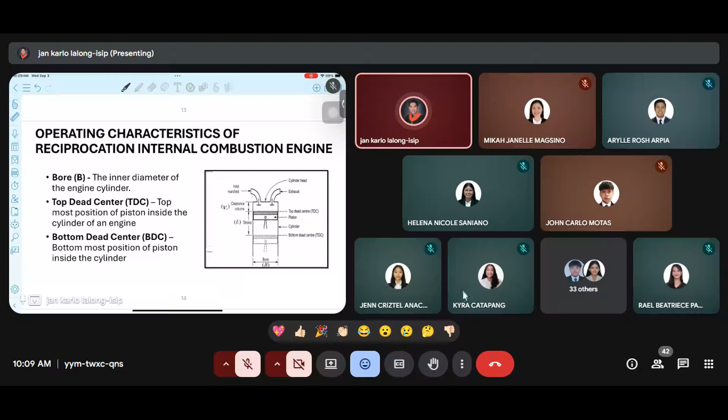First, ano ba yung mga parts or ano bang tawag dun sa mga parts natin ng ating internal combustion engine. Okay, so pakibasa nga. This is our first part.

Sige, have HN. Nandito ba? HN. Yung ano po yung bore po.

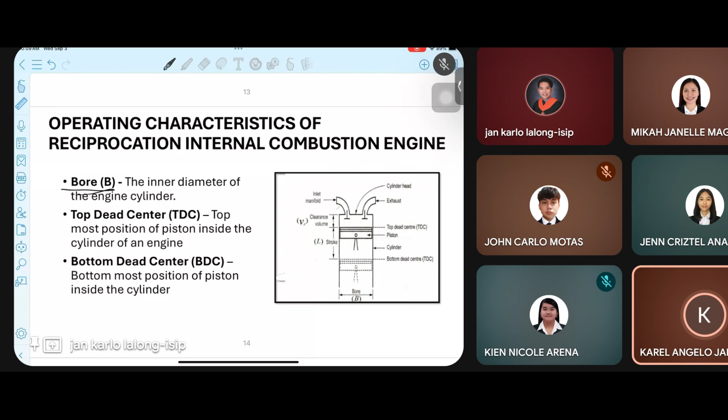Okay, so yung tinatawag nating bore, that is the inner diameter ng ating engine cylinder. So ito yung ating bore, itong part na to. So ito yung diameter ng ating cylinder, kasi our cylinder, syempre, that is in cylinder shape, so that is the diameter. Okay, so are we clear kung ano yung ating bore? Nakita naman.

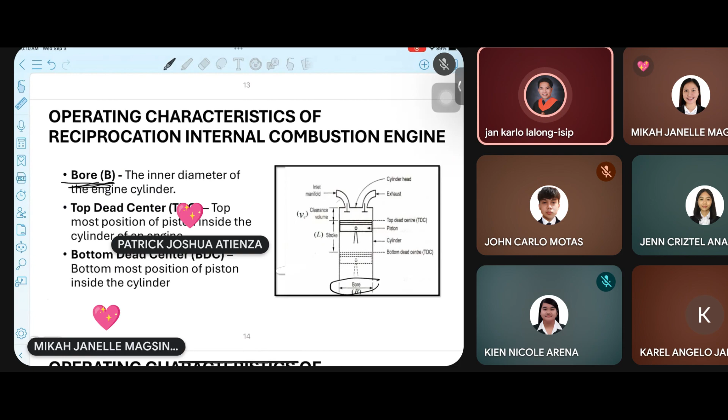Okay, so next natin, we have the top dead center. Ang top dead center natin, that is the topmost position of piston inside the cylinder of the engine. So that is the maximum height ng ating piston. So ito yung ating top dead center, meaning kapag gumalaw yung ating crank, yung piston natin, ito yung pinakamataas na level sa ating cylinder, or the topmost position ng ating piston sa ating cylinder. So ito yung ating top dead center na tinatawag.

The same, we have our bottom dead center. Yung ating bottom dead center, that is the lowest naman, so that is the bottommost position of the piston inside the cylinder. So dito, pagbaba ng ating piston, sa intake natin, so we have the intake and the power stroke. During yung pinaka-lowest point ng ating piston, that is called our bottom dead center.

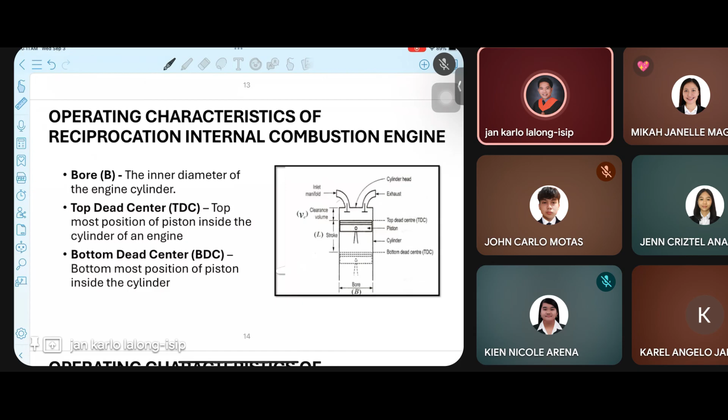So, kindly take note of those parts kasi in the future, use that. Okay, so next part natin, we have our stroke. So, wait lang. Thermo.

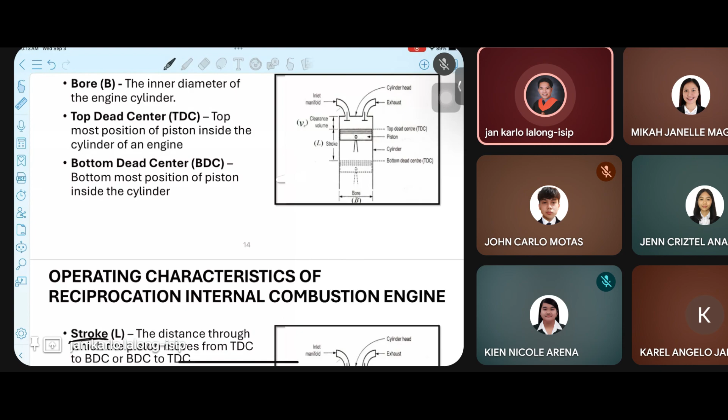Okay, so let's continue. We have yung ating stroke. So, take note na lang din ng ating mga variable na ginagamit. So, for bore, that is B. Top dead center, TDC. And the bottom dead center, that is BDC.

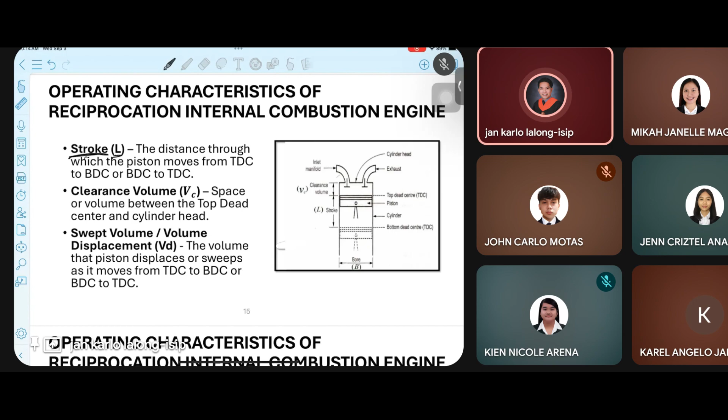Okay, so let's proceed with our stroke. So stroke natin, that is L, yung variable natin na ginagamit. So that is the distance through which the piston moves from the top dead center to bottom dead center. So sa madaling salita, yung ating stroke, ito yung distance from our top dead center up to our bottom dead center.

Okay, next we have our clearance volume. That is the space or the volume between the top dead center and the cylinder head. So pag sinabi natin clearance volume, kapag nasa top dead center na tayo, that is the volume from this top dead center hanggang dun sa ating cylinder head. So ito, itong part na to, yung ating clearance volume.

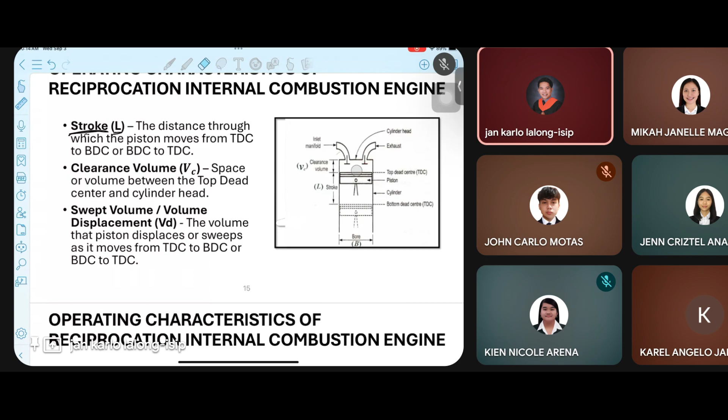We also have our swept volume or the volume displacement. So known siya sa problem as our volume displacement. So the volume displacement, that is the volume that piston displaces or sweeps as it moves from the top dead center to our bottom dead center. So yung ating volume displacement is from our top dead center up to our bottom dead center. So ito naman yung ating volume displacement.

Nandito ba? Arpia? Yes po, sir. So, paano na kaya natin makukuha yung volume ng cylinder given yung ating clearance volume at ang ating volume displacement? So, based on its definition.

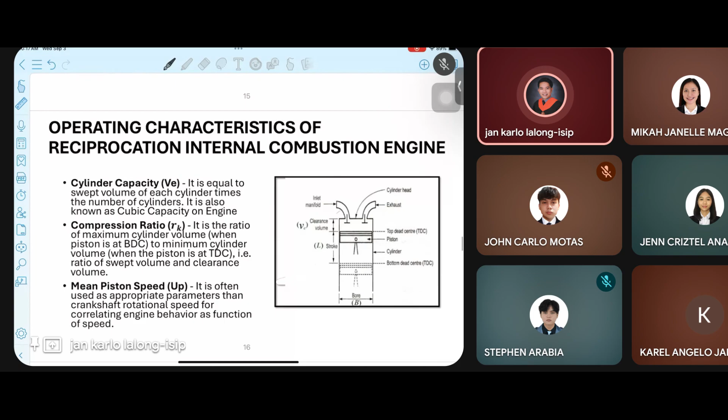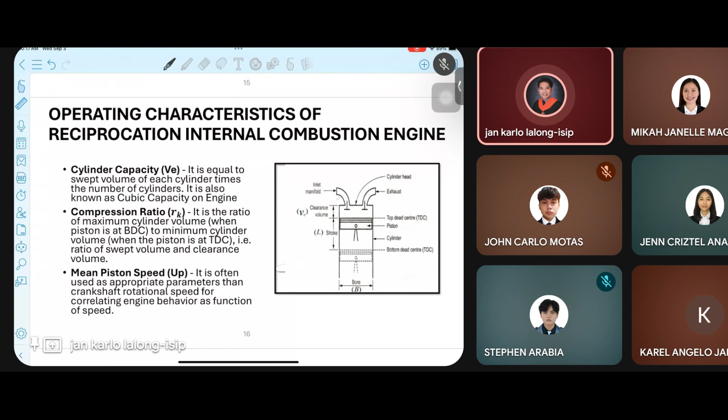Okay, so next we have our cylinder capacity. So yung ating cylinder capacity, it is equal to the swept volume of each cylinder times the number of cylinders. So alam naman natin, internal combustion engine, hindi lang naman iisa yung ating cylinder na ginagamit. So there are multiple cylinders na ginagamit natin depending on the type ng ating engine. So, yung ating cylinder capacity, that is yung swept volume natin or the volume displacement natin of each cylinder times kung ilang cylinder yung makikita natin sa ating engine.

So we have also here our compression ratio, that is RK, the variable we use. Please take note that this is the ratio of the maximum cylinder volume to the minimum cylinder volume. So what is that volume? We have the volume of the cylinder. Wait, that is not C because clearance volume is our VC. So the volume of the cylinder is equal to our volume displacement plus our clearance volume over our minimum cylinder.

So if we are asked to get our compression ratio, usually it's already given. But if it's not given, and what's given is our volume displacement and our clearance volume, then that is the volume displacement plus the clearance volume over our clearance volume. Okay, so did we understand our compression ratio?

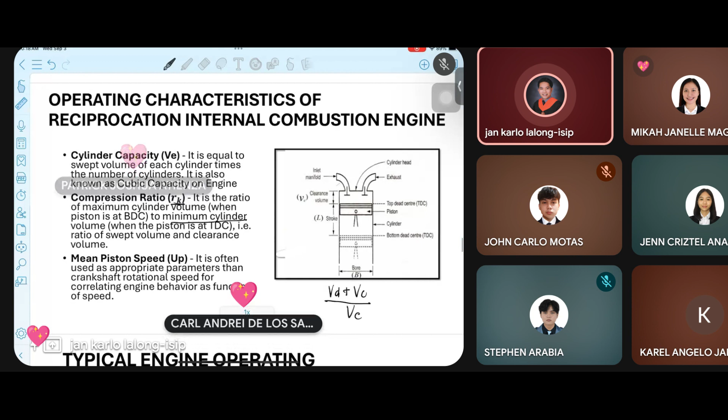So make sure that you absorb these terms. Okay, so our next term is our mean piston speed. Our mean piston speed is U sub P. So if it's just piston speed, that is U sub P. But when we say mean piston speed, that has a bar, so U sub P bar. Okay, are we clear with that?

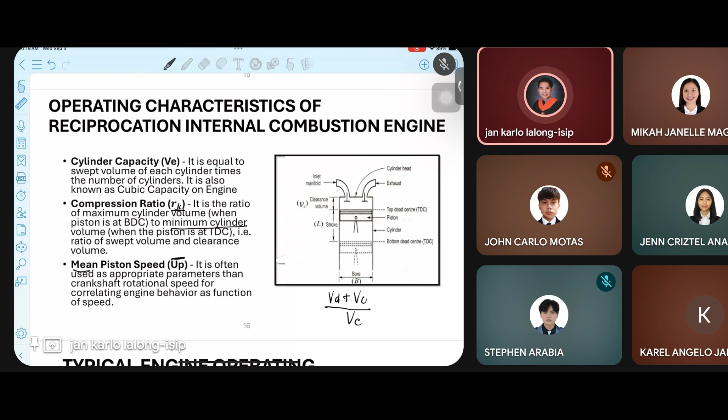Okay, so what is our mean piston speed? That is often used as a more appropriate parameter than crankshaft rotational speed for correlating engine behavior as a function of speed. Later on, I will show you the formula for the mean piston speed. Okay, are we clear with these terms? We are going to use this mostly later in our formulas, so kindly take note of these parameters.

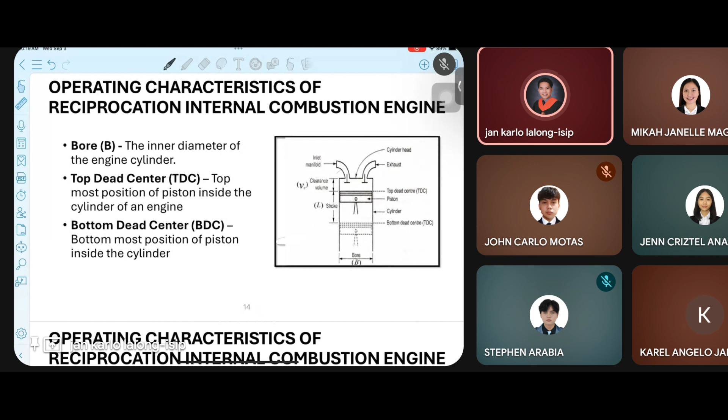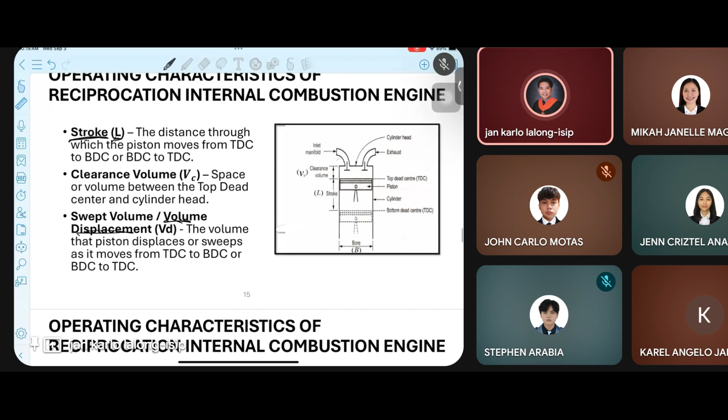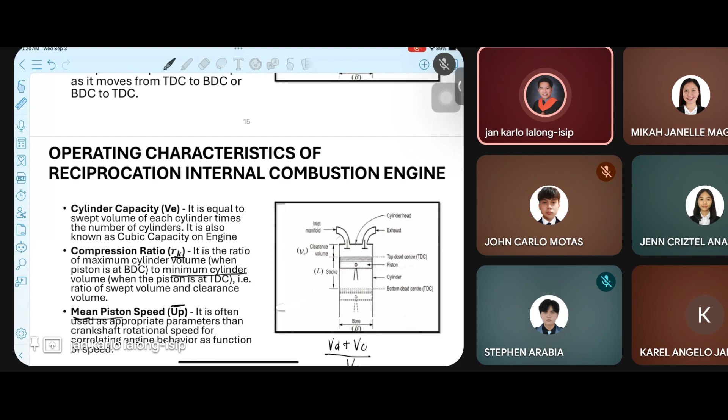So we have the bore, the top dead center, bottom dead center, and our stroke is L. Then our clearance volume is V sub C, our volume displacement is V sub D, and our cylinder capacity is V sub E. Then we have our compression ratio, that is RK, and the mean piston speed, that is our U sub P.

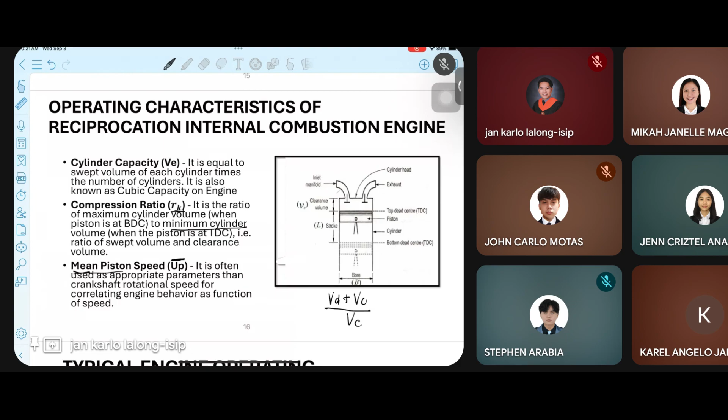Okay, so let's proceed with the typical engine operating parameters. So our bore size, the bore size of our engine, ranges from 0.5 meter to 0.5 centimeter. So these are the bore sizes used in our engine. This is available in our market, so we have 20 inches to 0.2 inches.

So the ratio of our bore to stroke, or B over S. Our stroke is L, so this is B over L. B over L for small engines is usually from 0.8 to 1.2. So the measurement of our bore to stroke ratio should be in this range - when we divide our bore and our stroke, we should get between 0.8 and 1.2.

Okay, so the engine with the same bore size, or the diameter of our cylinder, as our stroke is often called a square engine. That is called our square engine if the stroke is longer than the bore - if the stroke is longer than the bore diameter, the engine is under square.

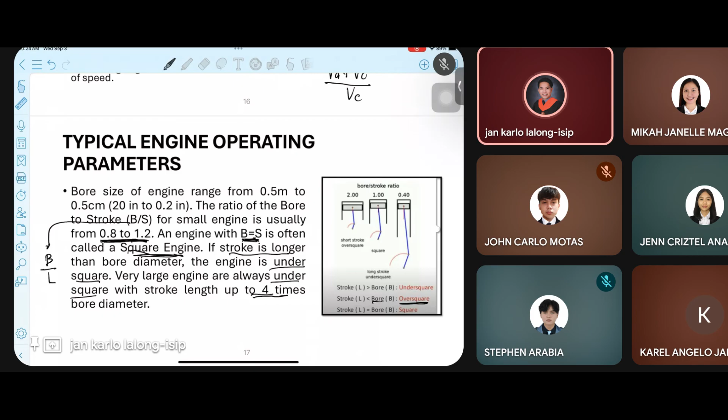Okay, so let's proceed with the formulas we use when we are talking about our combustion engine. So this is the first formula, for our mean piston speed. We have our U sub P bar. It is often used as a more appropriate parameter than crankshaft rotational speed for correlating engine behavior as a function of speed.

Okay, so the formula for the mean piston speed - we have our U sub P bar. The mean piston speed is equal to 2LN. But this is the formula for a 4-stroke engine. Because our formula here, this means only that we have the number of strokes over the number of rotations.

Revolution. Okay, so kindly take note that usually what we use is the 4-stroke engine. That's why the formula given in our reference is 2LN. But always remember that the 2 there means the number of strokes over the number of revolutions. Because in a 4-stroke engine, that is 4 strokes, and per revolution, our revolution is 2. So to complete the 4 strokes, we need 2 revolutions of our crankshaft. Okay, so we have 2, that's why it became 2.

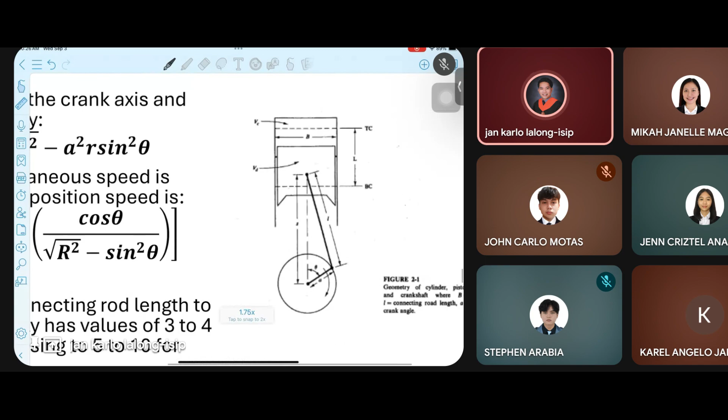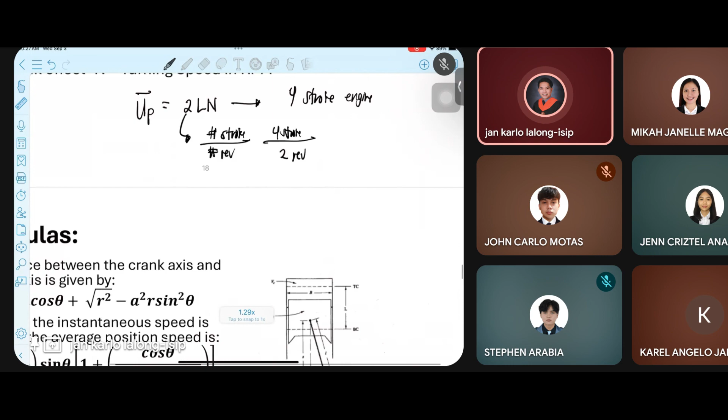So that is our formula for our mean piston speed. Kindly take note of that. We have mean piston speed is equals to 2Ln. Kindly remember that this is for a 4-stroke engine.

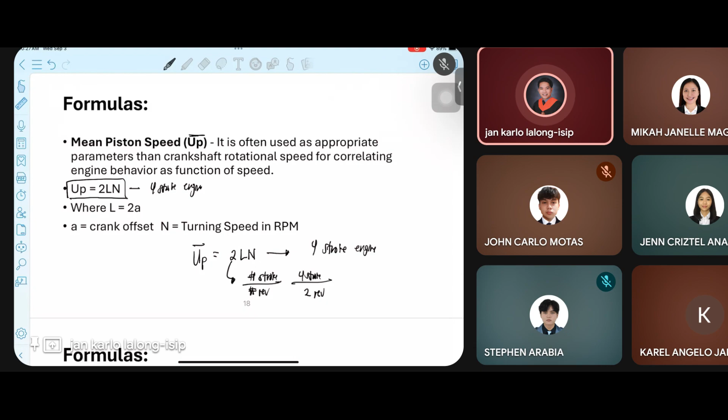Okay, we're done with mean piston speed. Has everyone noted that? Okay, so let's have the next one.

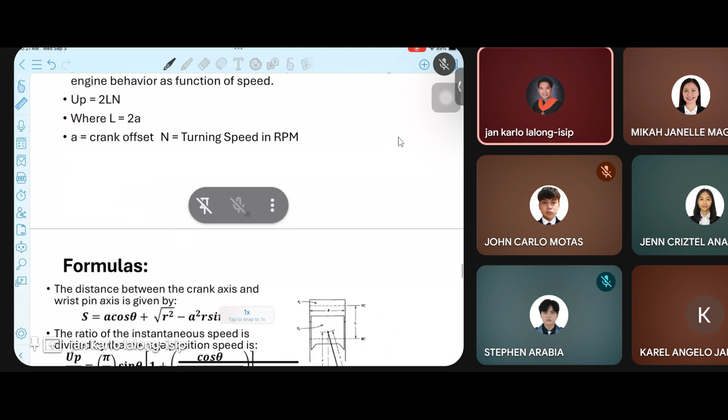Let's have the distance between the crank axis and the wrist pin axis. So this is our wrist pin, the mover of our piston. Okay, so the formula for the distance of our crank axis and the wrist pin.

Okay, so that is the S. We have this in any position, depending on the given theta or angle, that is our crank angle - whatever angle the crank is at. So the formula for that is A cosine theta plus the square root of r squared minus A squared sine squared theta.

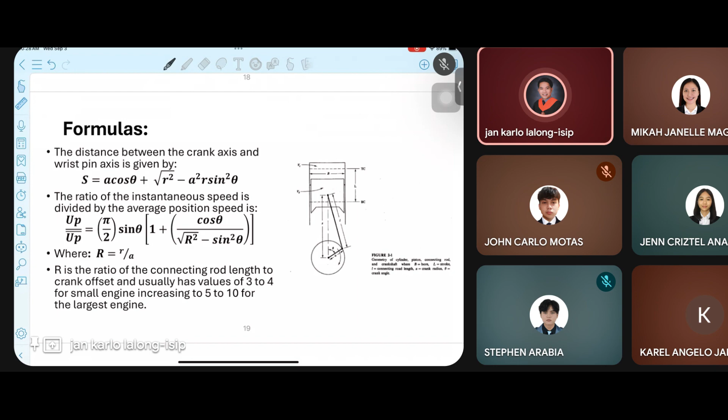So these are the formulas that are a bit long. So what is A there? Our A is the length of our crank. Our theta is the angle, the crank angle. So this is our theta.

So this is our A, and this is our theta, and this is our S. So if we are tasked to find the distance of our crank axis to the wrist pin at a given crank angle, this is the formula that we are going to use.

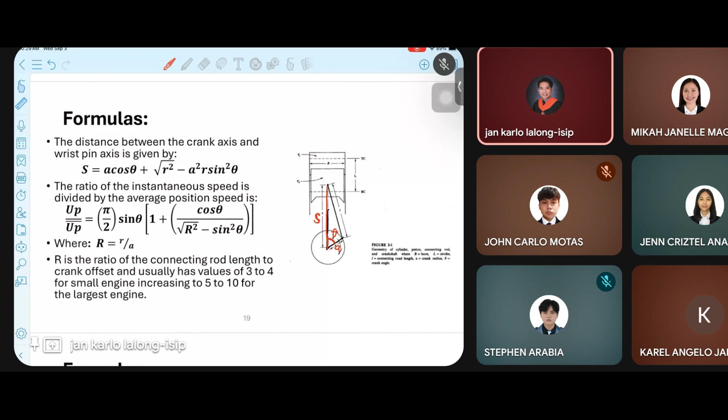Okay, so next is the ratio of the instantaneous speed - the ratio of the instantaneous speed divided by the average piston speed. So when we're asked for our instantaneous speed or our speed at a certain point, this is the working formula we use. So this is our speed at a given point, and this is our mean piston speed.

So our mean piston speed formula, we already gave that earlier, to be 2Ln. That's what we find using this working formula. Okay, so the ratio of our instantaneous speed divided by the average piston speed.

That is pi over 2 sine theta times 1 plus cosine theta over the square root of R squared - it's in square root but R squared as well, so that they can cancel - minus sine squared theta.

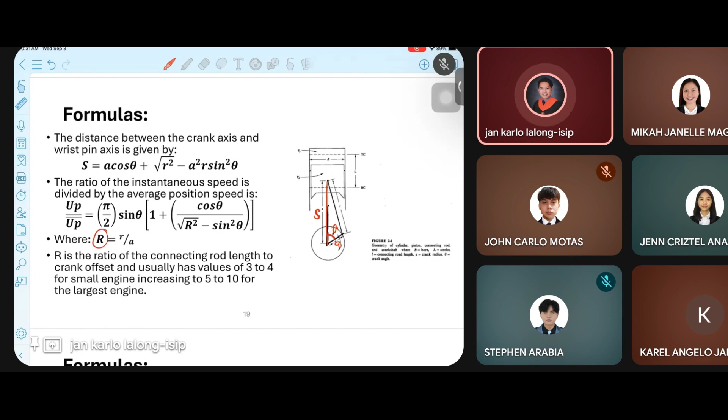Okay, so our R, that is R over A, wherein our R here is the connecting rod over our crank. Okay, so that's it. In this formula, this is our R connecting rod, this is our small r, and then this is our A. So this is our formula for our R, capital R.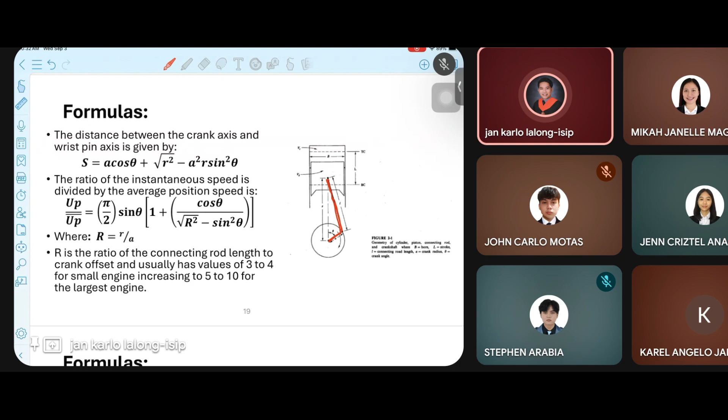Okay, are we clear with these first two formulas? So this is just our formula for our position analysis of our piston, and also for the speed of our piston.

Okay, so next let's have the volume displacement. So the displacement volume, we saw earlier, is the difference between the bottom dead center minus the top dead center volume.

So if we have our cylinder here, again this is our top dead center and this is our bottom dead center position. So our volume displacement, again, is this distance between these two. So that is the difference of the volume of bottom dead center minus the volume of top dead center.

Okay, so for a one cylinder engine, we can also use the formula for the volume itself of our cylinder. So again, our bore is the diameter of our cylinder, and our L is the stroke. So we can also solve for the volume.

If our bottom dead center and top dead center volumes are not given, we can get our volume displacement by this formula: pi over 4 bore squared times L. So that is simply the volume of the cylinder.

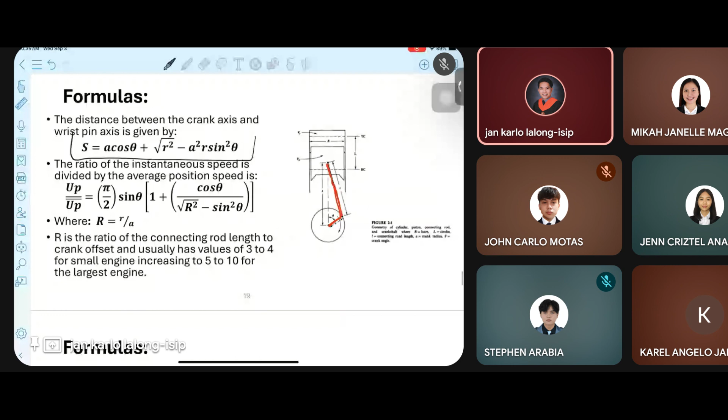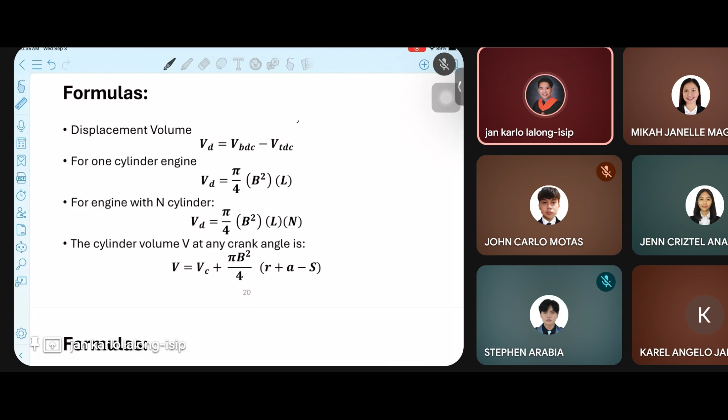Next, we have the cross-sectional area of the cylinder and the surface area of the flat top piston. So to get the cross-sectional area of the flat top piston, that is pi over 4 times bore squared, just the area of the circle.

For the combustion chamber surface area, that is ACB, which is the surface area of the cylinder head, larger than AP, the area of the flat top piston. These parameters are given when solving. So we have ACB plus AP plus pi times the bore times R plus A minus S. Again, these are our connecting rod and crank, and S is what we get from our previous formula.

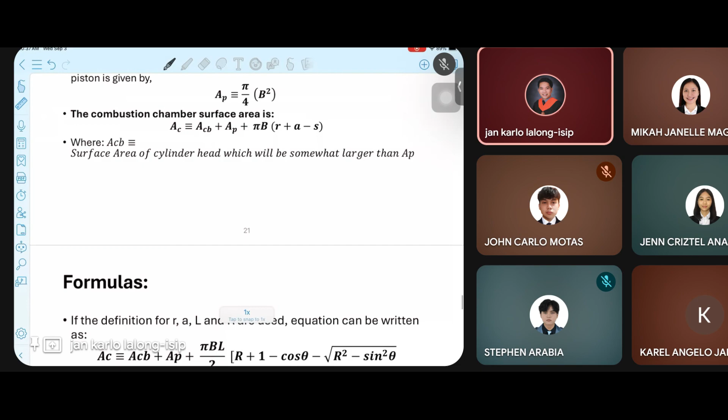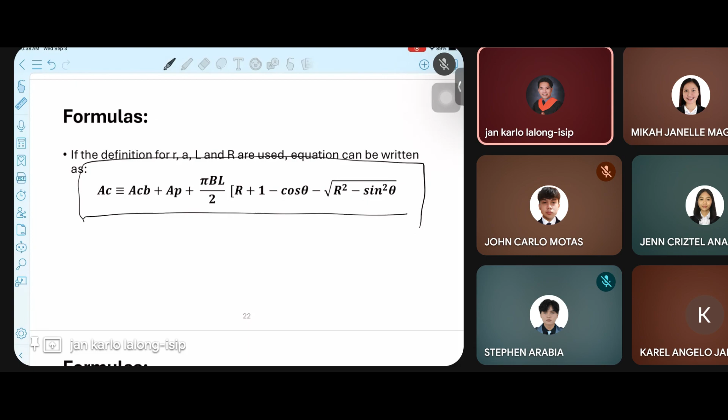So we have the minimum volume. Of course, our minimum volume occurs when the piston is at the top dead center, so it is called our clearance volume. As explained earlier, our clearance volume is the volume at the top dead center position, VTDC, top dead center. What's our volume?

Then the volume at bottom dead center is VC, our clearance volume, plus our volume displacement, as explained earlier. So our compression ratio is the ratio of the maximum volume, which is the volume at bottom dead center, over the volume at top dead center. As explained, the volume at bottom dead center is equivalent to this equation, and the volume at top dead center also equals our clearance volume. Kindly take note of this formula as well.

Other explanation for that? Si ano?

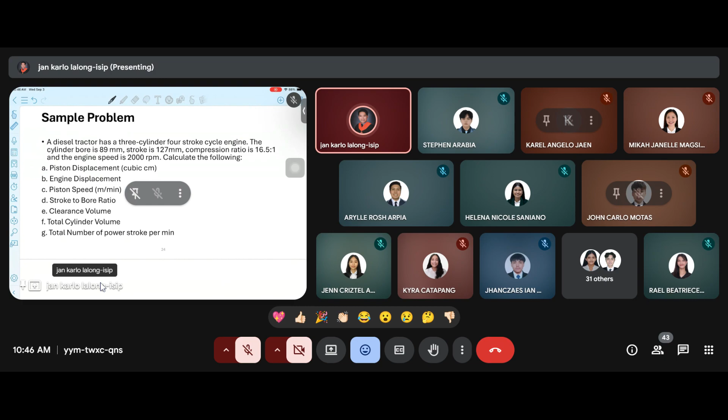The cylinder bore is 89 mm, the stroke is 127 mm, the compression ratio is 16.5:1, and the engine speed is 2,000 RPM. We're going to calculate the following: piston displacement, engine displacement, piston speed, stroke to bore ratio, clearance volume, total cylinder volume, and the total number of power strokes per minute. I will show you how we use our formulas to solve this problem. So we already have a screenshot of the problem.

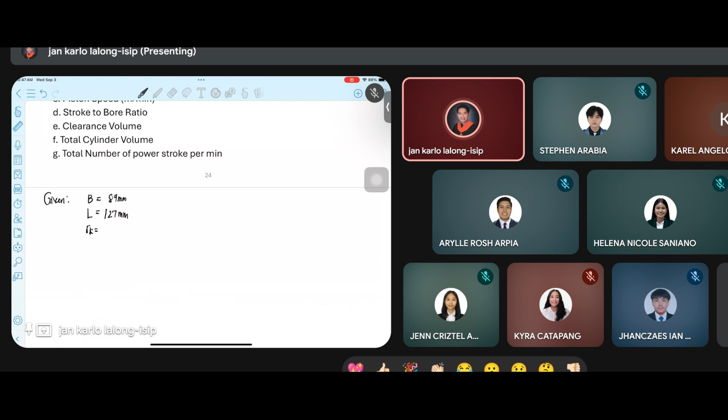Okay, let's write our given first. Our problem states that our bore is 89 mm and our stroke is 127 mm. Also given is our compression ratio of 16.5:1, so that is 16.5. And then we have our speed at 2,000 RPM. Next is the required - let's write our required, we have A to G required.

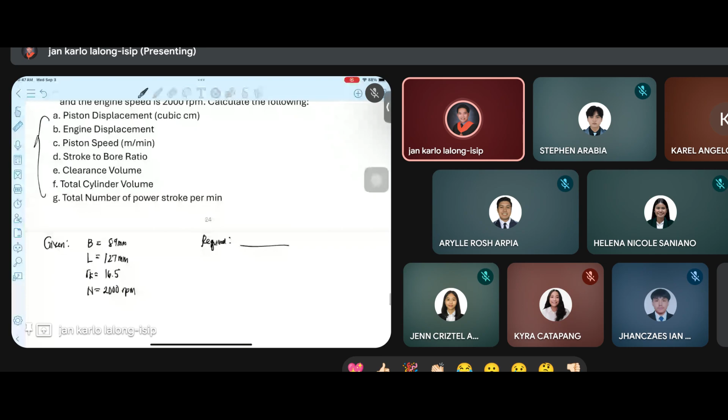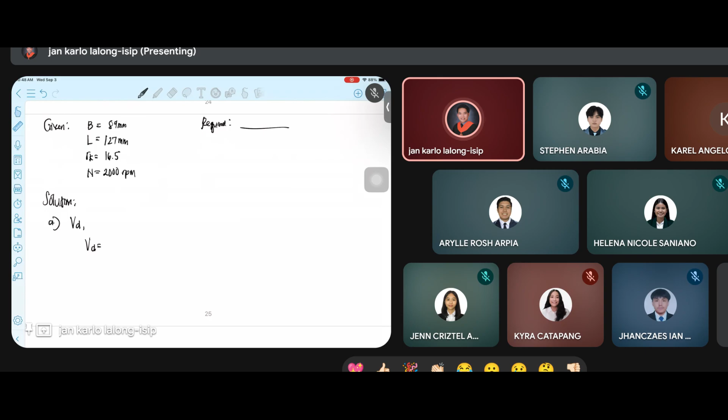Okay, so for the solution, let's start with letter A, we have the piston displacement, our Vd. For piston displacement, we are given the formula. What is our formula for the volume displacement? Roxas, are you there? Sir, the formula po, volume displacement po.

For the volume displacement, that is pi over 4 times radius squared. The radius squared - what we use is our bore. So we have pi over 4 times our bore squared, that is the diameter of our cylinder. And then our length. I told you last time to take note of this formula so you'll know what we'll be using, you'll master it through practice.

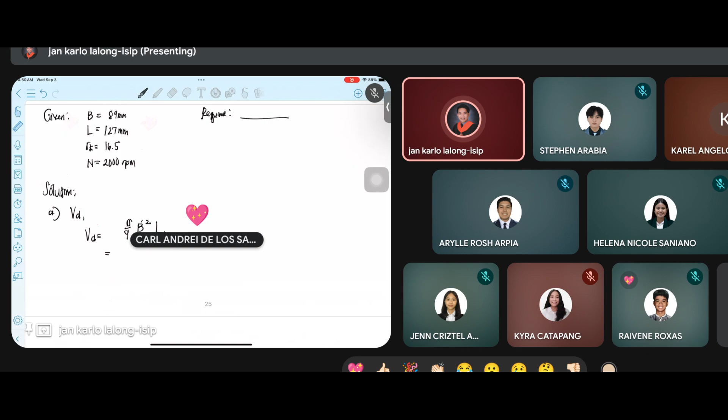Can you confirm if my formula written for the volume displacement is correct? Okay, please solve - we can get our volume displacement since our bore and stroke are given. Please solve, Arcelius. Please calculate what will be our answer.

Arcelius, are you there? So we have... Okay, the answer is 790,084.6342 cubic millimeters. So depending on what unit the problem requires, you would convert that.

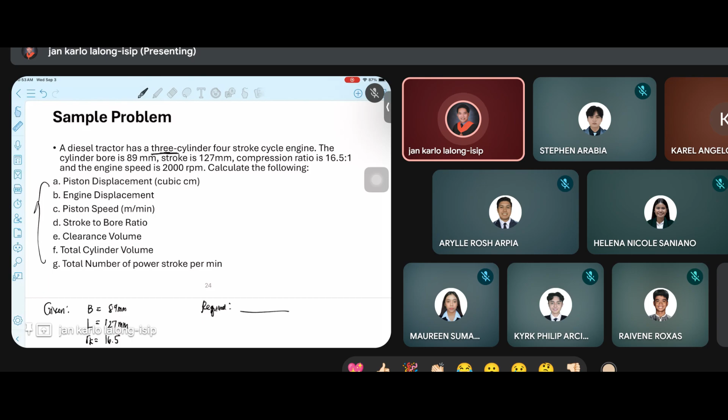So how many cylinders were mentioned in the problem? From the problem, we have 3 cylinders and 4-stroke engine. So we have VD, our solved VD, times our N which is 3. Our number of cylinders is 3.

So what will be the value of our engine displacement? When we say engine displacement, we already consider our number of cylinders. So what will be the value of our engine displacement? Equals that - sorry, what will be our value?

948, 1015, point 611. Is that right? Okay, so this is in millimeter cube. So now we have values for A and B.

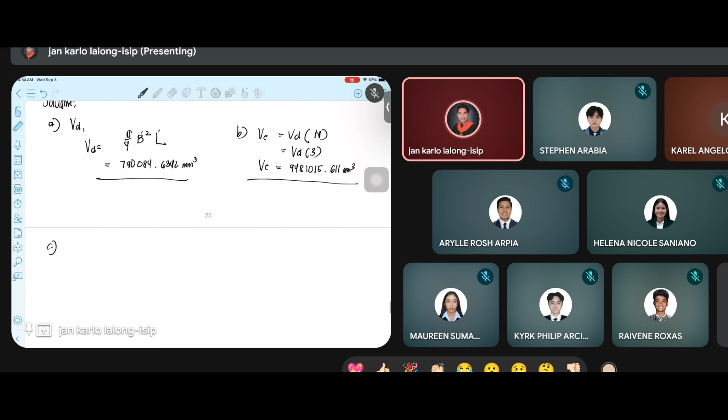Okay, let's proceed with letter C. What we're looking for, going back to the problem, is our piston speed in meters per minute. So that's what it says, meter per minute is what we need to get. Again, our mean piston speed formula is U sub P.

So what is the value? Sir, permission to speak po - sir, we got a different answer for the engine displacement. Okay, for the engine displacement, please check what the answer will be for our engine displacement.

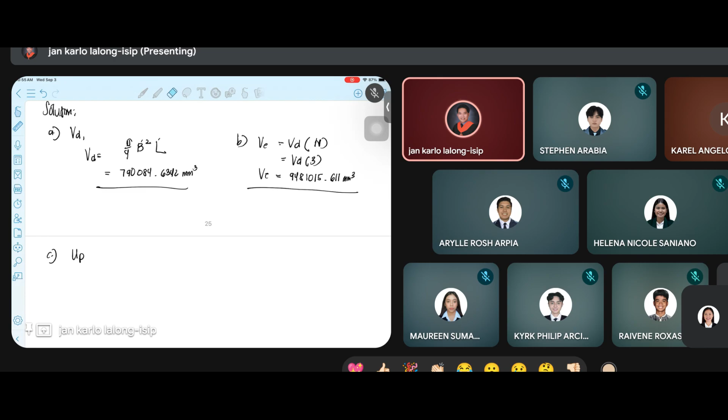So we have 2,370,253.903, and this is in mm cube. Is that correct?

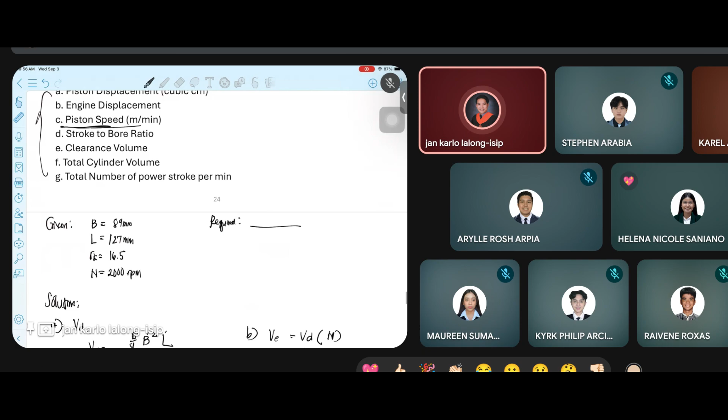Okay, let's proceed with our speed - calculating our piston speed in meters per minute. So what again is our formula?

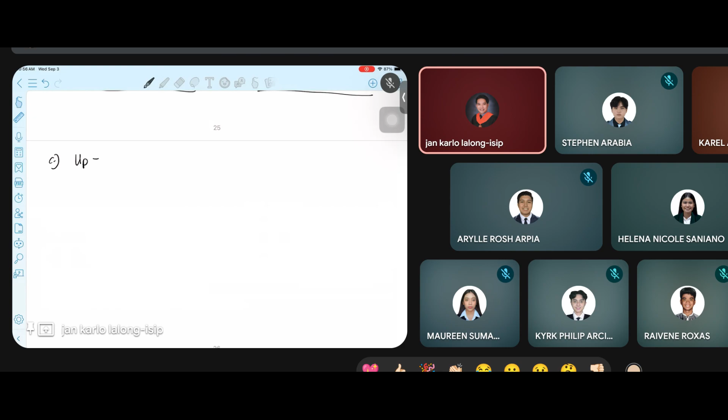Sir, excuse po. Si Generoso daw po ay yung sa chinat ko po na nakuha ng scholarship. Okay, dito naman is Perez, Kent Benedict.

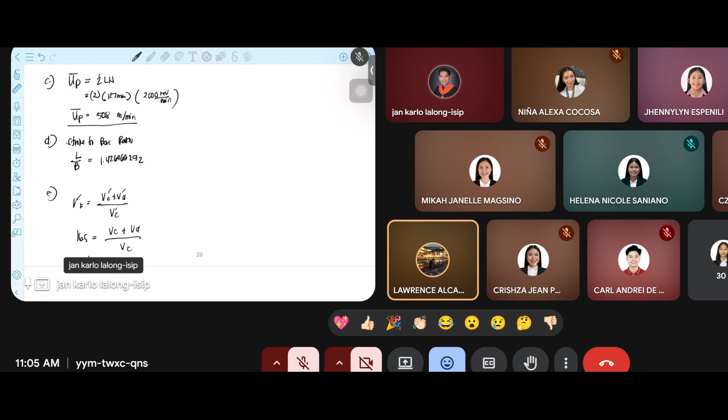Ang kukuha ay si Alcantara. So pakitype na lang sa chat box whenever you already have your answer. Nandito pa si Alcantara? Ako sir, sosolve lang. Okay, sige. Continue solve.

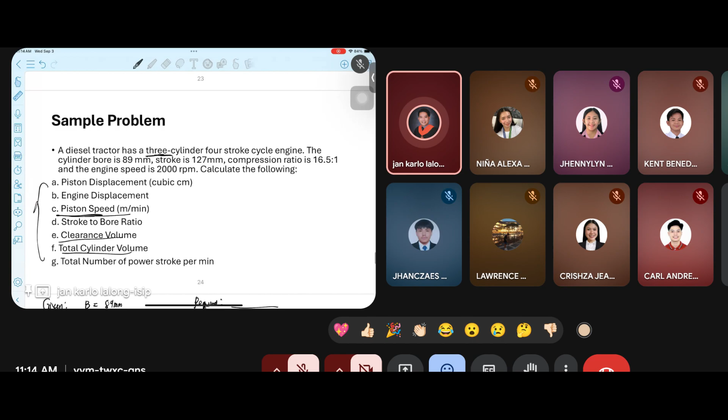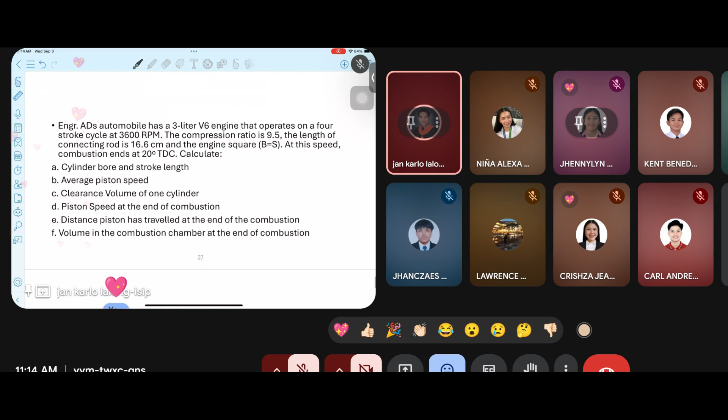Okay, I hope everyone followed yung ating sample problem. Nagets ba yung ating mga formulas na ginamit? Okay, so we have here another sample problem. Aside from sample problem 1, I want you to have the solution of that also, dun sa isasubmit nyo for your attendance for today. You are going to solve this problem. So screenshot ng ating sample problem, and this will be your attendance for today.

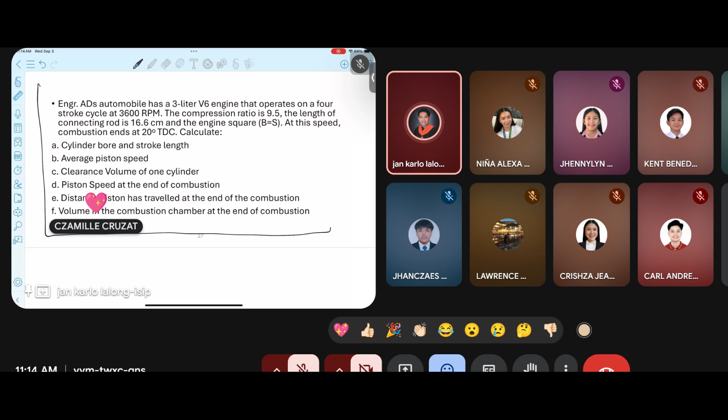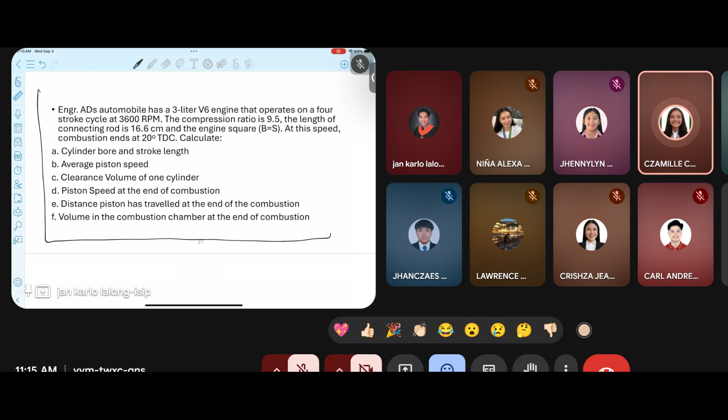Si Cruzat? Sir, kanina po doon po sa sample problem, yung letter A po, hindi po ba dapat naka-cubic centimeter po? Sinabi ba sa problem na, ayun, naka-given pala. Hindi ko lang napansin. So yun, convert nyo lang yung ating mga sagot into cubic centimeter. Hindi ko lang din napansin yung problem kanina.

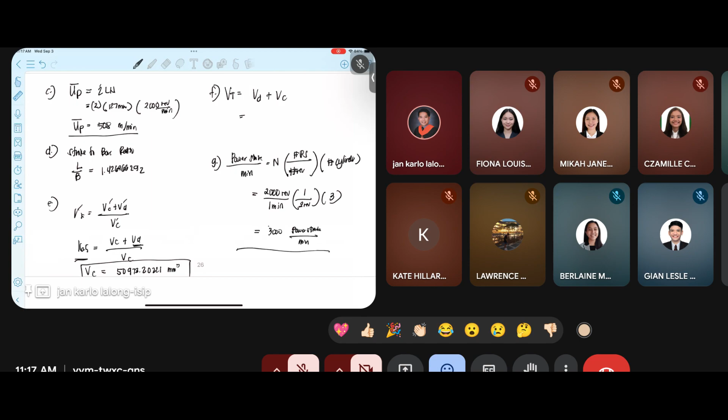Attendance roll call: Olave, present. Mercado. Hernandez. Belen, present. Dehan, present. Buwan, present. Arpia, present. Hermoso, present. Magsino, present. Perez, present. Zalameda, present. De Los Santos, present.

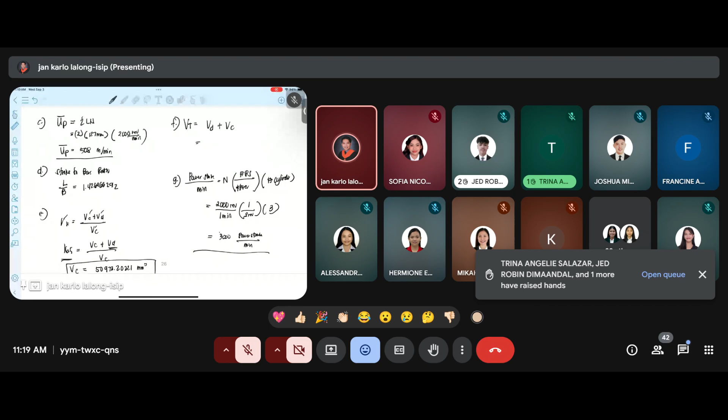May hindi ba ako natawag? Natawag ba lahat? Ay, si Hernandez nandito na. Si Salazar, may index card ka na ba? Meron po sir, so take note ko na lang din kasi baka nadoble lang siya. Bale, ang nagpaalam ay si Generoso, nagpaalam din. Sarabia, Del Mundo, Salazar, Dimaandal nagpaalam ba? Hindi. So ang absent is si Dimaandal at saka si Villena. Ay, Jerome Villena nagpaalam din. Si Dimaandal, present po. Ayan, okay.